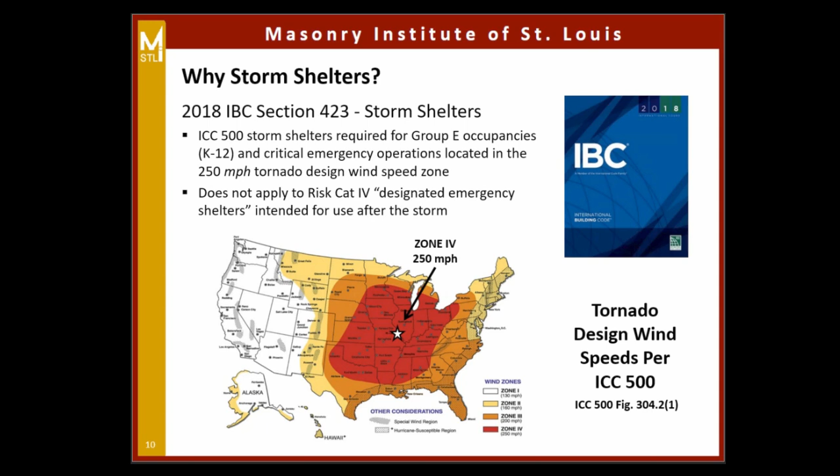So how many architects do we have with us today? Oh boy.

I'll apologize in the beginning that most of our discussion today is going to be structurally related, in particular with the ICC 500, which gives us everything we need to know about designing and constructing storm shelters, focusing primarily on the things in Chapter 3, which are structural design. But there are a number of chapters where architectural aspects fall, and that's a very important part of the overall storm shelter design and construction. The Institute has had seminars related specifically to the architectural side, and I'm sure they'll have more in the future, but we're going to be focusing on the structural aspect.

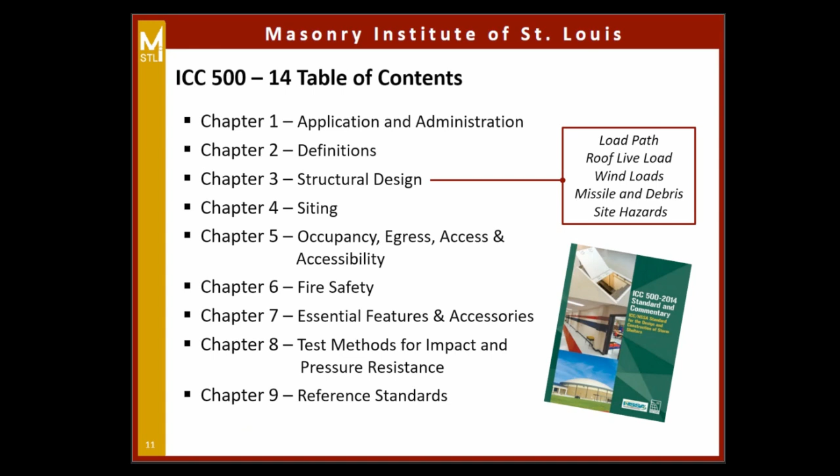How many have designed a tornado shelter? A few. Okay, very good.

So you're well aware of the increase in wind loads you encounter when you go from a normal building to a storm shelter level. Just to give you, for those who haven't done those calculations yet, here's a quick example of a little building I made up. I calculated both the non-shelter wind loads and the shelter wind loads, and you can see the line across the bottom: the increase in wind loads ranges from a factor of 2.3 up to 7.7. That's understandable because these tornadoes are very powerful and put a lot of pressure on these buildings.

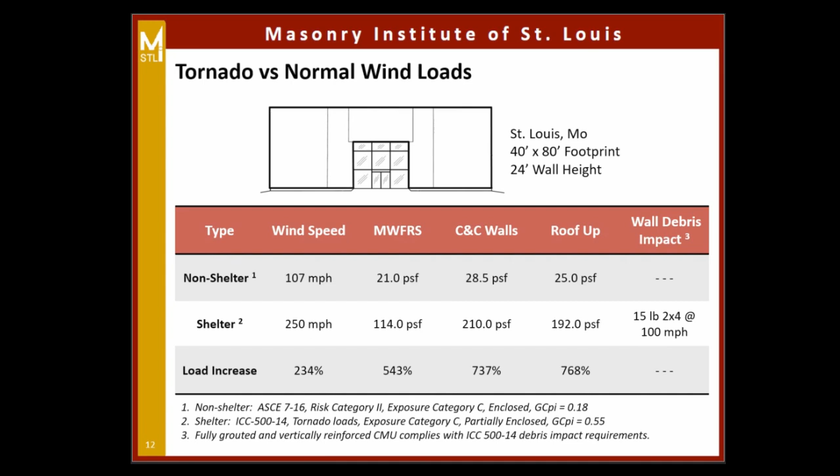The other thing you'll notice in the right-hand column for the shelters is the wall debris impact requirement. The code is trying to account for things the tornado may have in the air, throwing them around and maybe hitting our structure. The best gauge we have for that is shooting a 15-pound 2x4 at 100 miles an hour at your wall system. If it doesn't penetrate, you're deemed to comply with providing the minimum amount of debris impact resistance. The good news is fully grouted CMU with a minimal amount of vertical reinforcement satisfies this test, so it works very well for that.

Second bullet point: what about concrete masonry shelters? Well, the obvious one is I'm a masonry guy, and you're sitting at the Masonry Institute listening to a masonry seminar, so we are going to talk about concrete masonry storm shelters. When we first started seeing this mandate coming into the IBC, which I think was first in the 2015 version, we said there's going to be more projects requiring storm shelters in the future, especially schools. If you think about the type of material you'd want to resist high winds and impact, a mass capacity material like concrete masonry is a good choice. Also, masonry has a long history on educational projects, so we're sort of on the job already. We felt that taking a concrete masonry building on a school campus to the storm shelter level should be pretty manageable.

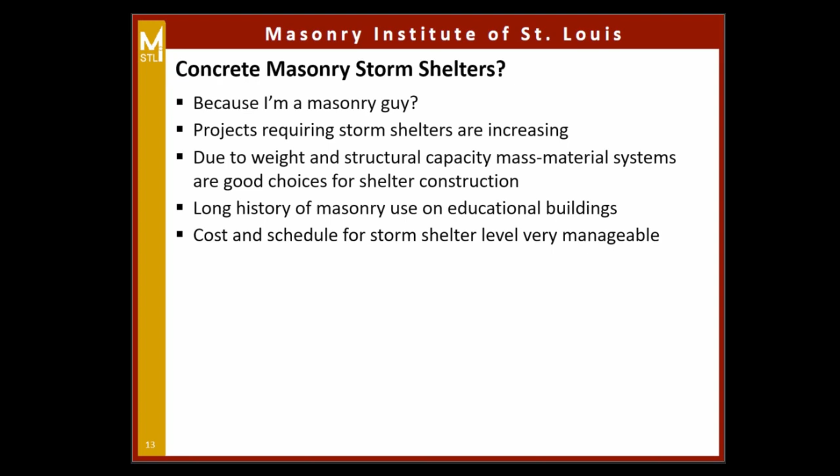These were the thoughts we had internally, and we wondered how we could go about verifying some of those. So to quote a famous TV commercial, we started saying 'Where's the beef?' To that end, in the summer of 2021, right after COVID was letting go of everybody, we brought some masonry designers into town and spent two days talking about what it would take to have concrete masonry serve for the wall systems of some storm shelters. We had a lot of discussion about requirements and detailing. We also brought in, on the second half of the second day, some of our local mason contractors and their foremen and superintendents, and talked to them about going from a regular building level to a storm shelter level, which was very helpful. And of course, no good meeting in St. Louis would be complete without going down to the Hill and having some Italian, so we did that as well. But the primary goal of the summit was to show that structural CMU can be used for tornado shelters for common educational uses, and when used, what the related detailing might look like.

Sorry for the busy slide, but I wanted to give you an idea of what the summit was like and what was determined during the summit and post-summit.

There are black bulleted points, and each one has its own backstory, but unfortunately I'm not going to have time to drill down into that today. I'll just let those speak for themselves right now. If you have questions, see me later or email me.

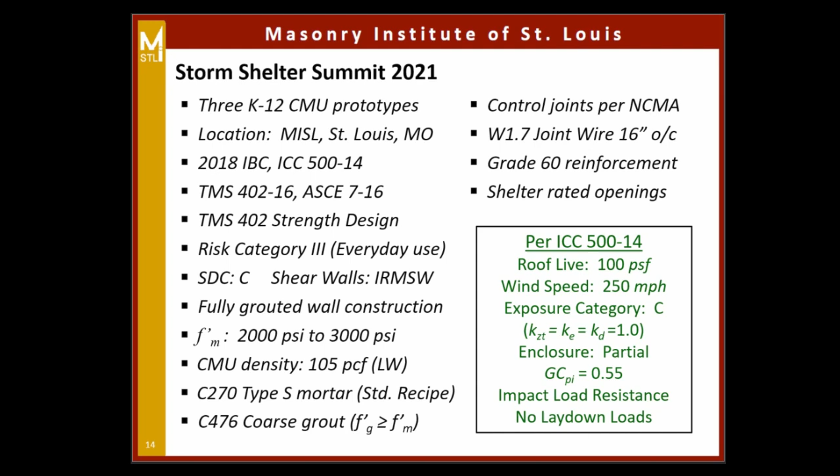So we came up with 3 prototypes, and what I'd like to do today, as much as 60 minutes or an hour will let us, is give you the current status of each one of the 3 prototypes we've been working on.

The first one you see here, we're calling it the elementary classroom. It's this shelter-in-place concept. You already have the students there, so if you increase the capacity of that structure so they can also shelter from the storm there, that might be a good approach. We're showing it as a standalone building for convenience and clarity, but this could be part of a longer wing, or it could connect to a bigger building as well.

Based on the footprint and height shown, and based on the literature review we did, we decided to go with hollow core planks, a precast concrete plank that would make the roof system. By the time we put a concrete topping on that, we estimated our roof dead load could be as high as 100 PSF. This is important when designing a tornado shelter because of the high uplifts you encounter on the roof system.

The more dead load you can have up top and still hold it up with your wall system, the more it helps offset the uplift from these wind events. You can see the list of wind pressures we calculated for the building, including the components and cladding, which we use for out-of-plane loading, and it's very high, 209 PSF.

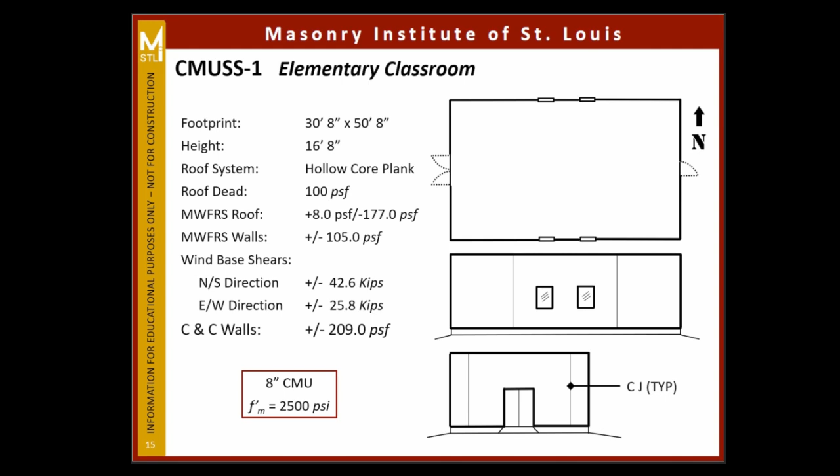Now, we're not designing the roof per se, but we did give it some thought in terms of size and layout. Of course, the final design would have to be by the engineer of record and also the manufacturer of the roof system. But we did anticipate having 4-foot wide panels, and that we would span from the top of the slide down to the bottom.

So those walls, top and bottom, would be what we're calling load-bearing walls, because the spans land on those walls, and then the other walls, where the walls are parallel, we're calling those non-load-bearing. Now, all walls do have some vertical load on them, so that's a little bit of a misnomer, but just to keep us straight on which walls we're talking about, that's what we decided to do.

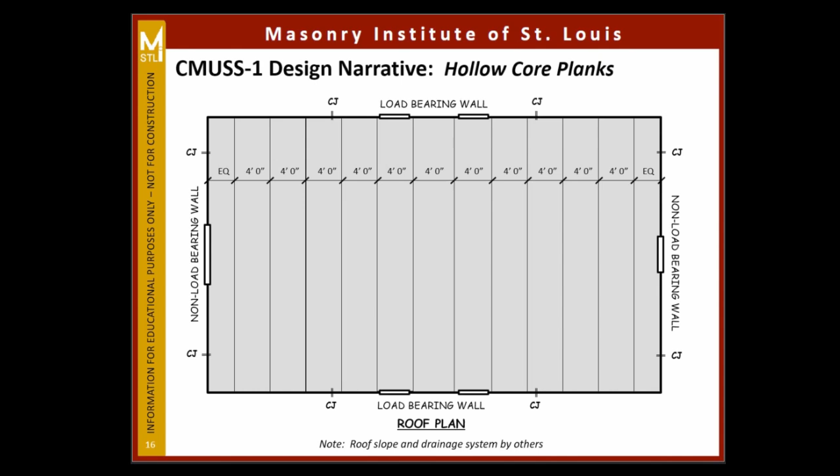And by the time you offset that with the weight of the wall, you still wind up with a little bit at the bottom of the wall. For the jamb, it goes up a little bit, of course, again because of the extra load that's coming from the missing masonry, so to speak.

The approach that we decided to take on this one is to develop that uplift into the wall. So we're using those 2-foot by 2-foot number 5 reinforcing bars that are bent in an L shape to connect the hollow core down to the wall. And by the time you have the correct development length, we can dump that uplift into the wall.

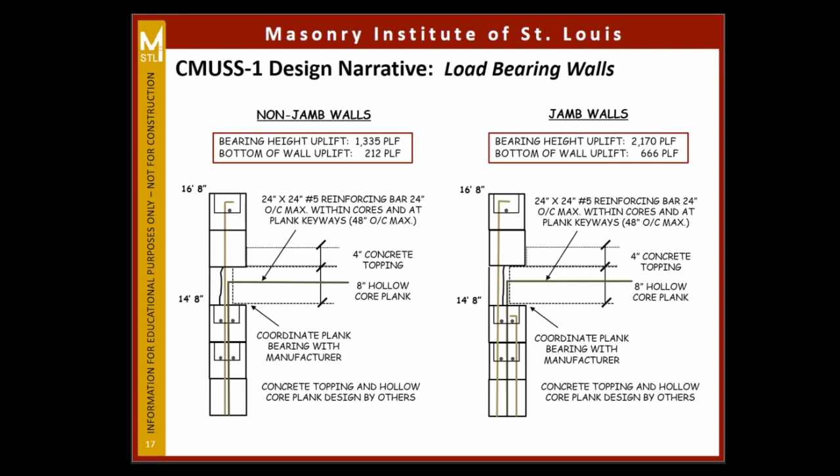For the non-load bearing, you can see now that we're looking at the cores of the hollow core. We're again going to let those come over onto the wall. There's a lot less load coming from the roof on these walls, so you can see the uplift is a lot less. As a matter of fact, we wind up having none at the bottom of the wall. So we're using the same approach. We're going to develop that uplift into the wall and then let the vertical bars deliver it to the foundation, or to the dowel to the foundation.

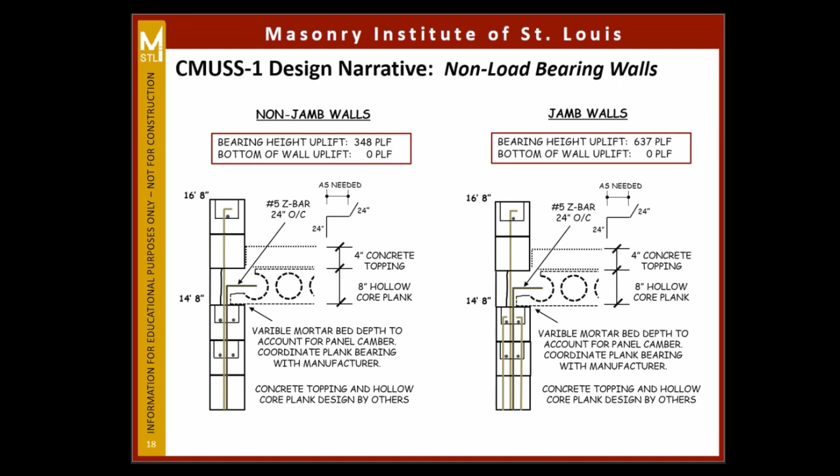But in this case, because of the change in the format of the hollow core, we're counting on what I call a Z bar, which is a number 5 that goes down into the wall, up and over, and then into the page, or to the slide, if you will. And that'll all get grouted in together and connect the hollow core to the wall in that fashion.

So I wanted to show you a little bit what we're finding out on the vertical and horizontal reinforcement. This is kind of a schematic. I hope you find it helpful. This is for the load-bearing walls. So the panels are landing on these walls. This would be for the north-south elevation if you're tracking that. The green bands represent the horizontal reinforcement in either a bond beam or bond beams or a beam over or under an opening.

At the top we have that one course bond beam with a number 4 bar. Coming down to the bearing bond beams, there's a 2 course. We're going to have 2 number 4s in each one of those courses.

We decided to put a bar at the first course at the bottom of the wall. Some masonry designers feel this is kind of optional. The general feeling I've seen is that it's good to have a horizontal bar in the vicinity of the dowels coming out of the foundation, either within the wall or at the top of the foundation itself. Since this wall is already fully grouted, it's not a big deal to lay another bar in there and take care of that. If I was doing a partially grouted building, I may or may not put that bar in there, but then you'd have to coordinate that with the foundation designer.

Then the beam, we have beams over and under the 2 window openings there. Above, we have a 2-course beam with a number 4 bar in each course. That beam delivers the vertical load to the sides and also the out of plane loads from the masonry above and the window below to the jambs on each side. We put a 1-course beam underneath the opening for good measure with 1 number 4 bar there. You'll notice we've decided to extend that detailing to cap the total jambs on each side of the openings. For the jamb width, we took advantage of what masonry was available and used that as our total jamb.

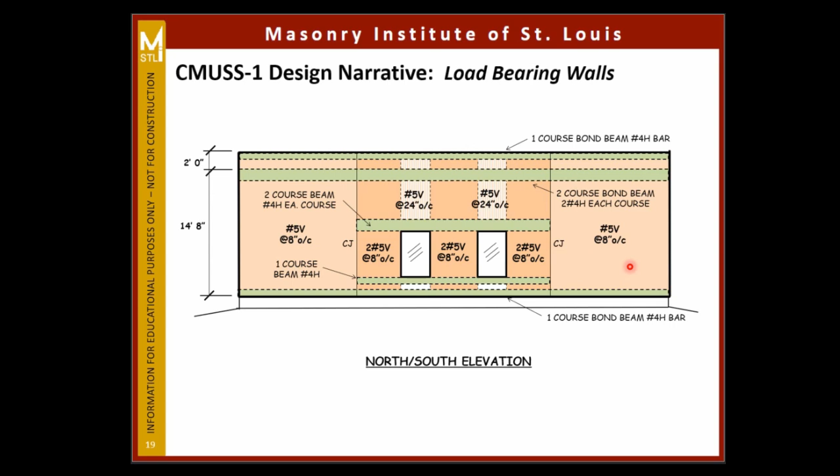Looking at the non-load bearing, here the panels, the hollow core panels, are parallel to these walls. Most of this is the same, I believe. The beam over the double door went to a 4-course with 2 number 4s in each course because that's a little wider opening, more load coming to the jambs to get the vertical load and the out of plane load to those jambs. The jamb width, we decided to go with a 6T assumption on the jambs.

The reason for that is it was kind of done historically, but also because there are no control joints at these openings, so we felt like we could have this all work together as one item around the opening. A 6T for an 8-inch unit would be 48 inches, or a 4-foot effective jamb is what we're counting on there. In this case, because there is more load, the jamb reinforcement went up to 2 number 6s, 8 inches on center, rather than 2 number 5s. But on the lower elevation there, where we're back to a smaller opening, it did go back to 2 number 5s.

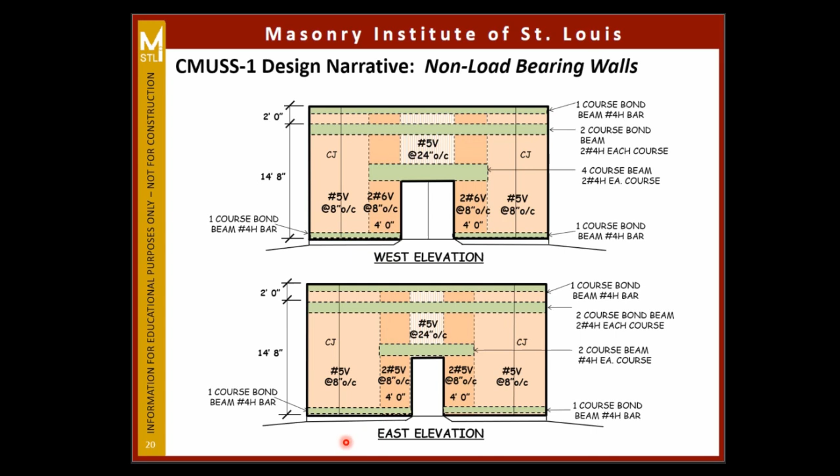So the second prototype is what we're calling a middle school gym. We wanted it to be big enough to have a basketball court, so it could be used to play basketball, or it could be used just as a general activities room. You can see the footprint there. The overall height of the building is now 30 feet. We're starting to track the ceiling height because if you play volleyball or something in there, you need that extra height to do that.

For this building, we had seen in the literature where precast double T concrete roof system was used a lot. So we decided to go with that, and we felt like with a concrete topping on there, we could be at 100 pounds per square foot dead load again. Again, you can see the wind loads that we came up with for the building based on its size and shape. And we decided to go with a 12-inch unit, but holding the F'm at 2,500.

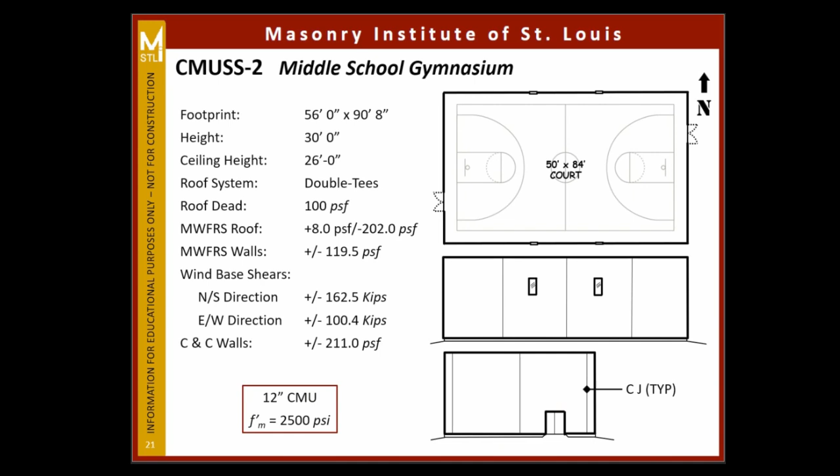Moving on to the roof, again, we're not doing the final design here, but this is what we're envisioning: 8-foot wide double T panels, shown by the solid lines. The dotted lines represent the T stems that come down 4 foot on center. We were expecting these to span from the top to the bottom, so we have load bearing walls up top and non-load bearing on the sides.

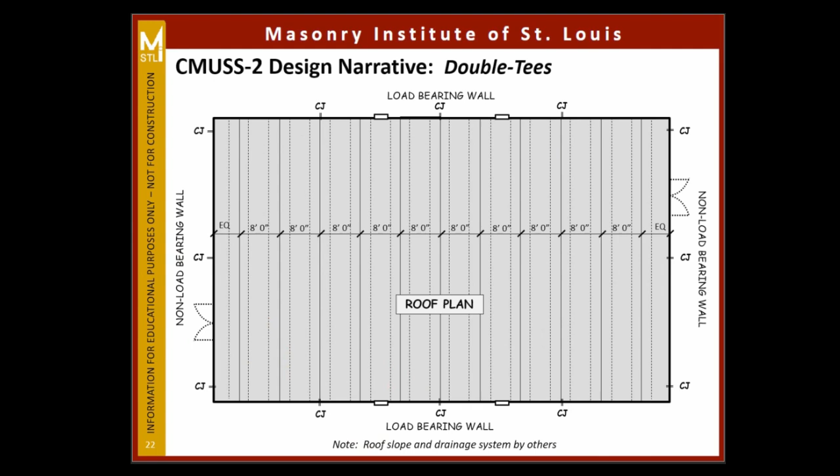So the top of wall detailing for this system works for both jambs and non-jambs, for load bearing jambs and non-jambs. The reason the same detail works is whether it's a jamb or not, it needed 2 bars per cell, so really the same detail works. The only thing that changes is the vertical bar size.

You'll note the uplift box there. We're estimating that each double T stem, when it lands on our wall, will be bringing approximately 15,500 pounds of uplift. That became more than what we could handle by dumping it into the wall and expecting the vertical bars already there, doing something else, to get that uplift down to the bottom. So we had to go with a dedicated tension tie.

You can see that called out down here at the bottom. So at every double T bearing location, there's a bar that's going to be welded to the bearing plate in the masonry, continuous all the way down to the foundation. It's not counted on for out of plane or in plane design. It's only there to be engaged if you get net uplift coming from the roof system, which you definitely do in this case.

So you can see we're letting the double T come over and share the 12-inch wall below. We decided how we're going to enclose the ends of the double T's, since they're generally not solid, by going with a 6-inch closure wall. That goes from the top of the bearing all the way up to the top of the wall. The purpose of the closure wall is to give us that impact resistance, and it closes off the ends of the double T's.

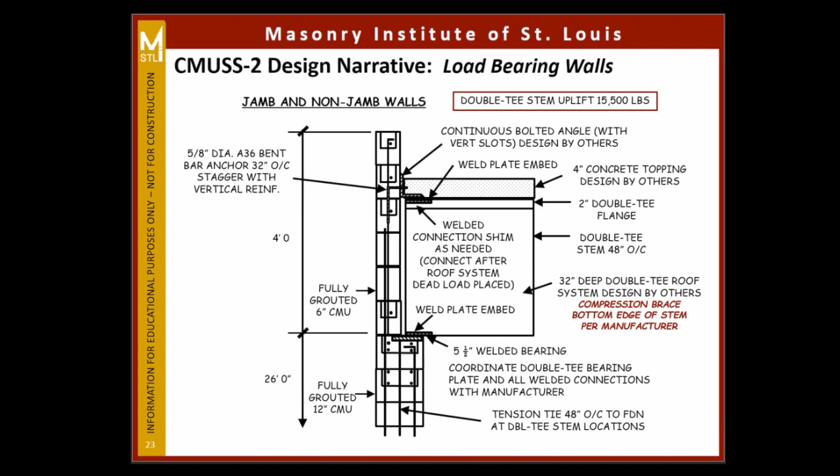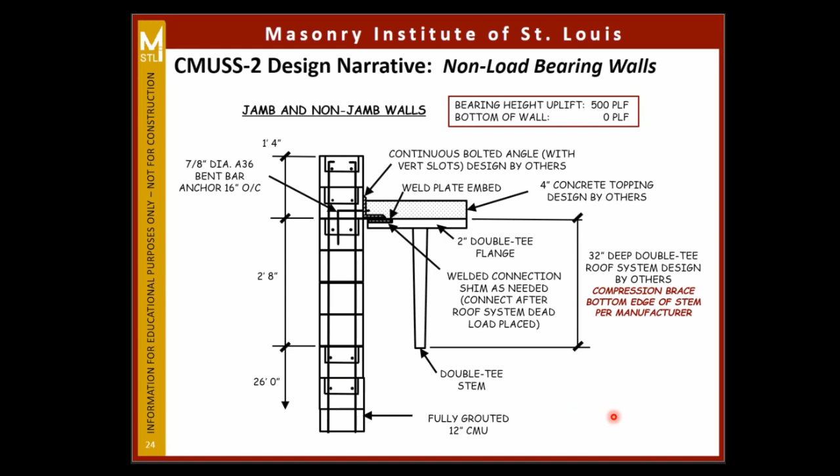So looking at the horizontal and vertical reinforcement, the same kind of pattern we saw before. The green is for your bond beams or your beams over and below windows. You can see the jambs there. We're using a 6-foot again for the jamb width, so that would be a 12-inch unit. Would be 6 feet for that, and that's what we're counting on for the jamb width.

The non-jamb vertical reinforcement you can see is 2 number 5s, 8 inches on center. When you get into the jamb, that would go to 2 number 6s. This masonry below the window needs a little bit of help, so we're putting a number 6 bar, 8 inches on center there. Then we go back to the 2 number 5s, and again 2 number 5s on this panel over on the far right. This white panel, just the panel to the left, would be the same as the panel to the left - I just didn't bother to color code it.

Notice the tension tie there all across this elevation. That would be at each double T stem bearing location, and that would be a number 6 vertical bar going all the way down to the foundation. The rest of the horizontal reinforcement is pretty standard, what we've already seen on the top of wall detailing.

I did want to talk about the closure wall. You can see that's up here, the 6-inch closure wall. We're counting on a number 5 vertical, 32 inches on center there, and the bond beams called out here agree with that top of wall detailing that we saw. But we had a decision to make where the 6-inch wants to become a 12-inch, and what we decided to do is let that 6-inch unit just die into the 12-inch unit. So what you're seeing in white here is a 12-inch unit from the side walls coming through.

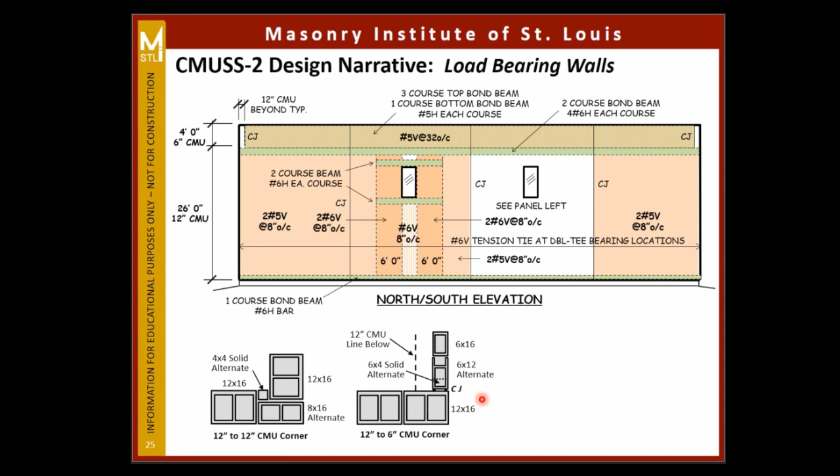But when we had that 6-inch at the top, we decided to let that 12-inch unit come through and die the 6-inch unit into it. We'll probably put some control joints there to give a little movement if we need to, so we don't get a lot of cracking there. You can see the 12-inch bearing line below where the double T's will be coming in to this system. And then, to stay on bonding again, the mason will have to do a little piece of solid and then take a unit, cut it down to 12 inches.

So if you look at that in elevation, you have that 12-inch to 12-inch corner down here. Above the 26-foot bearing line, you have the 12-inch units showing with the control joint, and then whatever the mason needs to do there to get back on coursing. May not be the best detail architecturally, but we thought for now structurally that's what we would go with to do that transition.

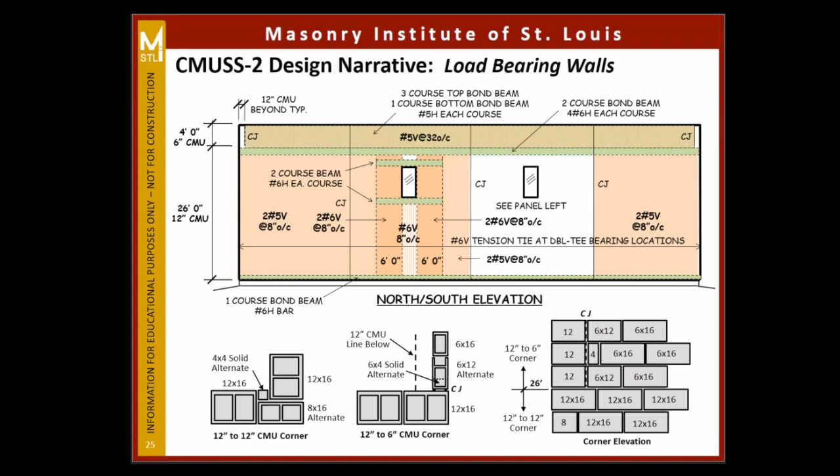The non-load bearing wall reinforcement schematic there, very much what we just saw. Still 2 number 6s, 8 inches on center.

When we get to the jambs, because of the bigger door, the size of the opening, and because this wall spans taller than the other walls, we had to go to two number 8s, 8 inches on center for the jamb reinforcement. And that beam over the opening is a 3-course beam with a number 6 horizontal bar, top and bottom, to make that system work out. We're doing a number 6 vertical bar, 8 inches on center over the opening.

And again, no tension ties needed on these elevations for the east or the west. So also no closure wall needed.

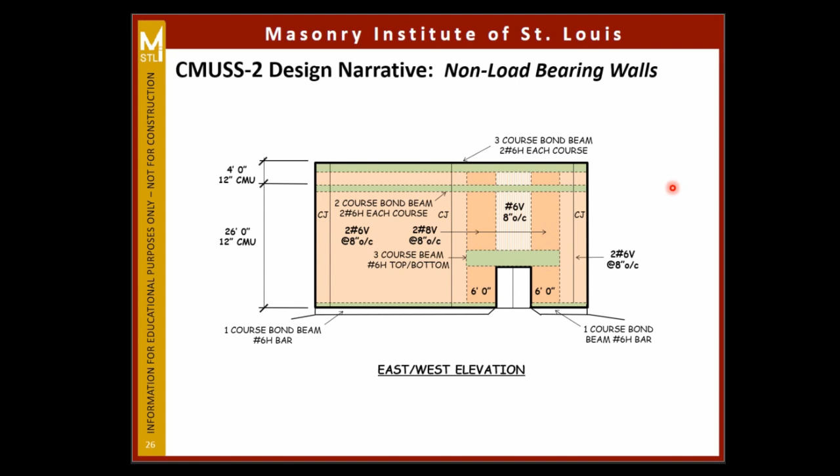All right, so here's the third one. It's the largest one. Look, what we're calling perhaps a high school gymnasium, where you enclose the basketball court, but you also have some space for some bleachers on one side. And so this 104 foot by 104 foot is the size of this building, 38 foot tall.

With a ceiling height of 30 feet. We had seen in the literature where some double T's are used for this size span for storm shelters, but to be different, we wanted to see what it would be like if you tried a structural steel roof system, just to see how that detailing would come out.

Now, the first thing you're faced with if you do that is that it's going to be a lighter system overall. Even if you put a concrete topping on it, we thought we could only count on 60 pounds per square foot of dead load. So not only is the building going to have more uplift due to its size and shape, but also the fact that it's going to have a little less dead load on the top.

And you can see those wind loads there that we calculated. We wanted to stay at a 12-inch unit, but we thought we might go up to an F'(M) of 3,000. This is still within range of most areas in the country. Certainly here in the St. Louis area, you can do an F'(M) 3,000 quite easily.

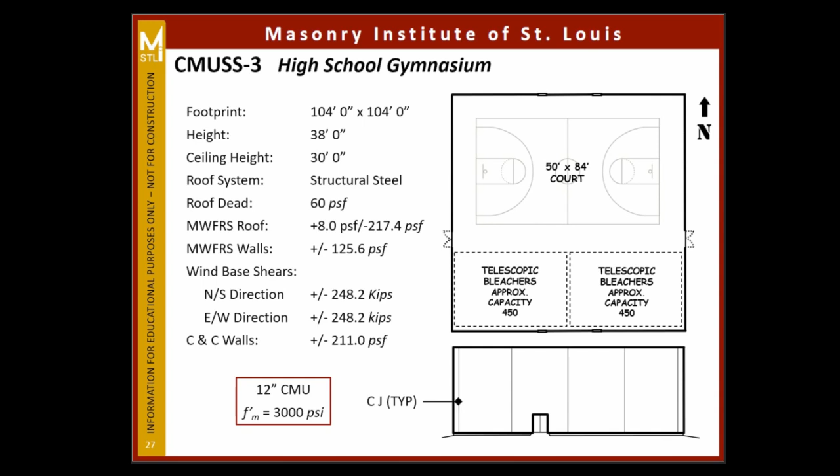So a little bit of a busy slide because of the size of the building, but basically, first of all, I wanted to thank Dr. Mark McGinley from the University of Louisville. He did the preliminary schematic design on the structural steel roof that you see here.

Basically what it is, an 80-inch deep joist, main joist, that's spaced 56 inches on center. You can see that we're anticipating having some double joists to straddle the door opening, because each one of these joists will need a tension tie at the bearing, and we didn't want that to happen over a door opening.

So we're going to put doubles on each side, or anticipate putting doubles on each side. We may put another joist in between the two doubles just to pick up the roof load, but we're not counting on it that much for uplift.

You'll also notice that we have turned the joist at the ends of the building with what we're calling sub-joists that are 80 inches deep and 56 inches on center. One of the reasons we did that is that it allows us to keep the bearing height for the system the same all the way around the building, as you'll see in the top of wall detailing.

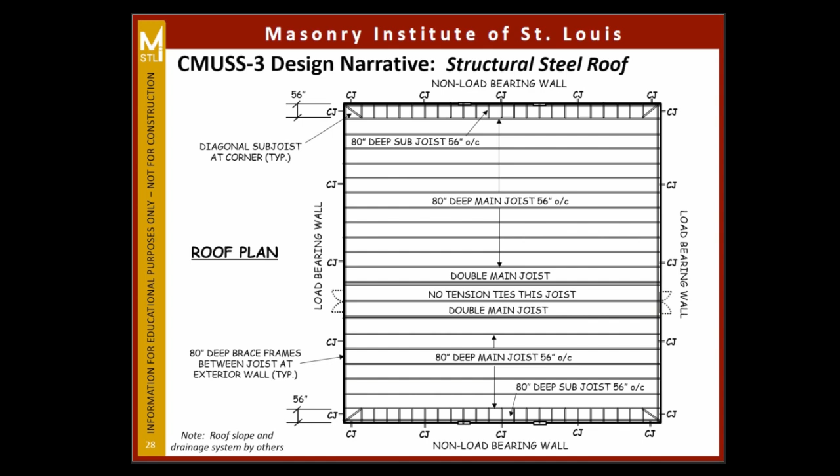We're also anticipating that you could put 80-inch deep brace frames between the ends, in between the main joists at the ends, and also in between the sub-joists to provide more lateral stability for the system overall.

Top of wall detailing, this will be for both the load bearing and the non-load bearing, because the top of the wall bearing height remains the same. It also works for jamb and non-jamb, because we again need 2 bars per cell either way. It's just the size of the bar will change. And we're letting the main joist or the sub-joist come onto the wall.

And again, we're using that 6-inch closure wall as we did with the second prototype. A little bit taller, but we were able to still get it to work, serving those same purposes. In other words, providing the closure to the system for impact, but also helping dump the shear from the diaphragm down to the wall below.

Now, we also anticipate that this brace frame in between could also help do that, but that would depend on the final design and the engineer of record, how they wanted to approach that.

The 2 bond beams underneath the bearing, again, serve as diaphragm chords, but also they've been checked to support the top of the wall in between the bearing location, which is 56 inches on center.

And the uplift here, as you can see, for each main joist, we're anticipating 40,000 pounds of uplift coming from each one of these main joists. Now, the sub-joists that are turned the other way would be much less. So the key is for those main joists, and again, we're going to do a tension tie, as you can see right here, that would go from the bearing point all the way down to the foundation.

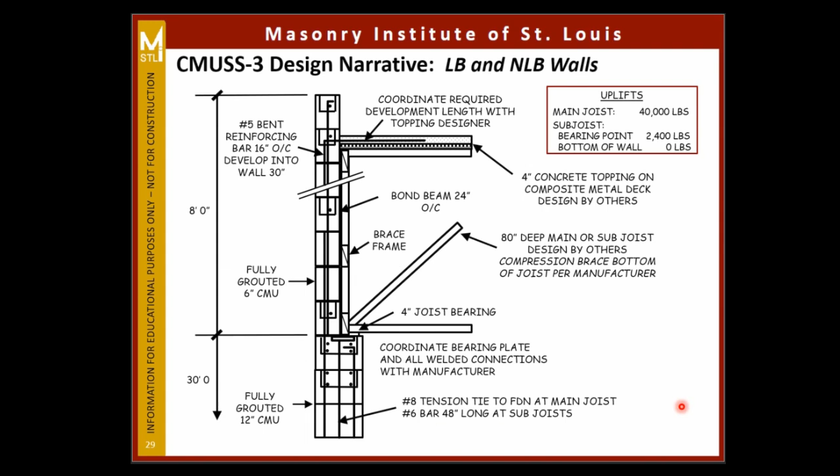Horizontal and vertical reinforcement, color coding is the same. The non-jamb is 2 number 6s at 8 inches on center, going to 2 number 8s in the jamb location, which is 6 feet wide.

Looking at this, you could extend this detailing over to the control joint if you wanted to. We decided not to show it that way for now. Then back to the 2 number 6 vertical bars.

We have a 6-course beam over this opening due to the size of the opening, the span, and the out-of-plane load coming on the building. 6 courses of masonry with 2 number 7s at the top course and the bottom course, so that's about a 4-foot deep beam there.

The closure wall works pretty much the same as before, except we're not having to make that transition. We're turning a 6-inch unit around the top of the building, which we felt was a lot easier that way.

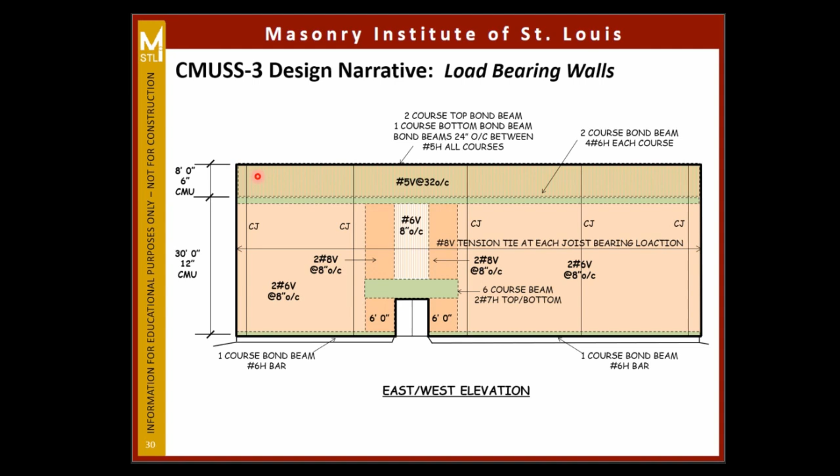Okay, that was load bearing. This is non-load bearing, where we have the little window opening, 2 number 6s again, and the non-jamb.

Now we're only at 2 number 7s for the jambs, and the top of the wall still works the same. Tension tie not needed here because we're able to distribute that uplift from those smaller subjoists down into the wall.

I know that was really quick, but that's what we have so far on these 3 prototypes. The good news is so far it's showing us that we can use reinforced concrete masonry for storm shelters on some of these common educational uses on projects, and we think it should actually be a system worth considering on those types of projects.

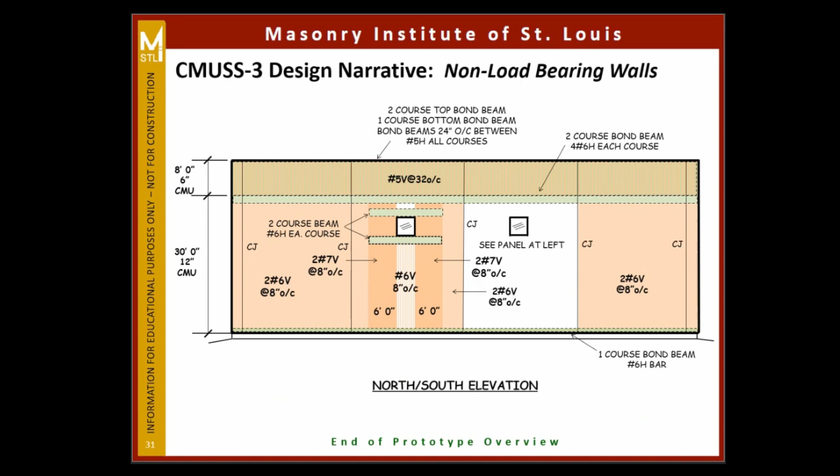What I'd like to do for the time we have left is share with you some of the other things related to the storm shelters. First of all, some comparisons we've been making, shelter versus non-shelter. At the top here, we're looking primarily at structural, where we have the 3 prototypes listed.

You can see the change in the CMU—actually, there's not much of a change really, except on the second one. The big change is that the non-shelter can be done with partial grouting. The storm shelter, even if you could get it to work with partial grouting, you would still need to fully grout for the impact resistance. So that's just a given on storm shelters.

Looking at what I call the base reinforcement, in other words the non-jamb reinforcement, you can see for the shelter on the smallest one it was 1 number 5 at 8 inches on center. We could go to a number 4 at 32 inches on center if it was a non-shelter.

For the second one, 2 number 5s, every cell, could be a number 5 every 2 feet. And then on the larger one, 2 number 6s at 8 inches on center could be a number 6 at 16 inches on center.

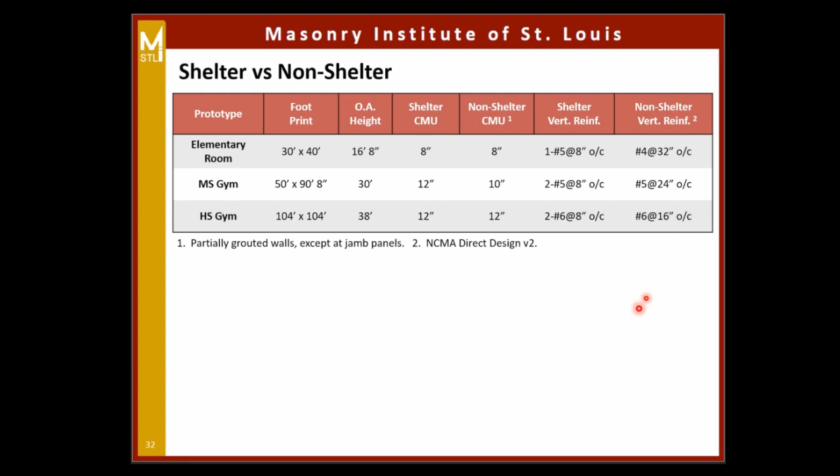Then once we took a look at that, we also wanted to get a feeling for what is the cost change and schedule change going from a non-shelter to a shelter.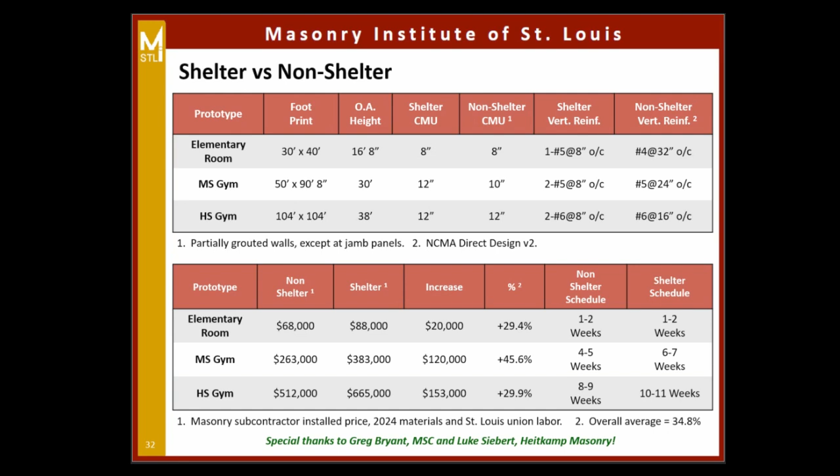Big thanks to Greg with the Masonry Structural Coalition for running those numbers in conjunction with Luke Siebert, one of the owners over there at Heitkamp Masonry. We appreciate them working through that.

The last bulletin point was what about seismic? And what I decided to do here is, seismic is still important. You have to design these storm shelters for seismic even if you're in a low seismic area. But what I decided to do for the 3 prototypes is show you the base shear coming from the seismic compared to the wind, also the out-of-plane wind load compared to the seismic.

What you'll notice for our 3 prototypes, since we're pretending these buildings sit right here where you're sitting, based on the seismicity, you can see that the wind base shear always controls. So your in-plane design is going to be controlled by wind, and your out-of-plane is very much controlled. It really drives the bus on these out-of-plane designs.

But you might say, well, what if you're somewhere where the seismicity is higher? So I did the same thing for Cape Girardeau, where I assumed they would be seismic design category D, which drives up the seismic forces. You can see for these fully reinforced larger walls that the seismic base shear starts to compete and take over the wind, but not by much, okay?

And then if you look at the out-of-plane, you're still 3 times more on the wind load. So typically what happens is you size everything for the out-of-plane wind. What we're finding is by the time you do that, you have more than you need for the in-plane shear walls, especially these prototypes that have longer concrete masonry shear walls. So it's really still the wind that's going to govern your design there.

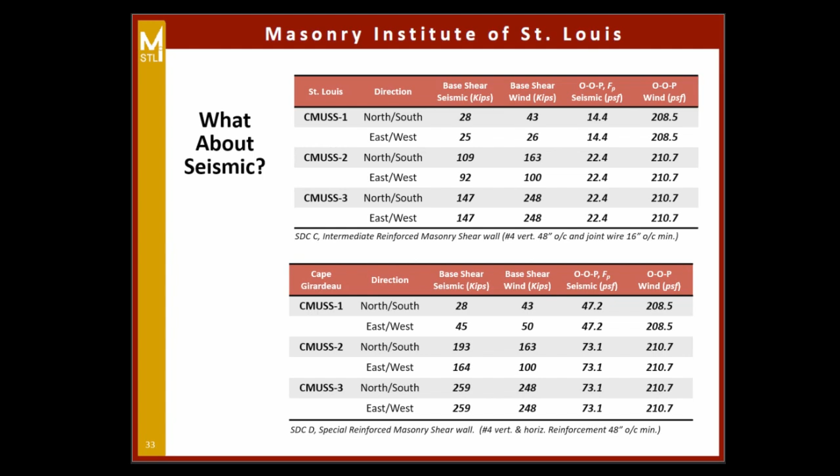Just a few other things. Lap splices. We do intend to have a full table of lap splicing for these prototypes. We are using the lap splice equation from TMS 402, Chapter 6. We are not counting on the IBC 72 bar diameter cap that it places on this equation. We just thought that wasn't prudent to do for these storm shelters. Also, if the calculated lap splice was less than 48 bar diameters, we're thinking about increasing the lap splice to 48, because most of our masons are still very familiar with that old 48 bar diameter rule for lap splices.

Now, using this equation, if you have a big bar that's offset toward the outside face of the wall, you're going to get some long lap lengths. As a matter of fact, for the number 8 bar that we saw in some of the buildings, the lap length is 117 inches, which just doesn't make sense anymore. So what we're probably going to do is recommend that for number 7 and number 8 bars, you go to a mechanical coupler instead of trying to lap those bars to do your splicing.

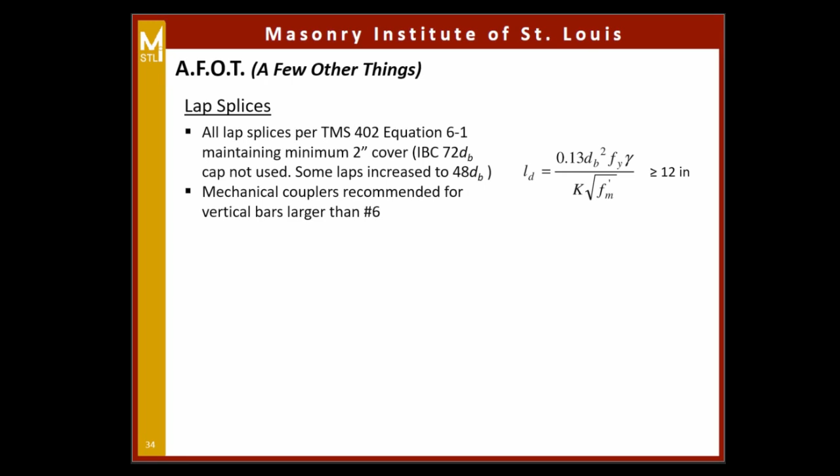They're becoming more popular, more projects are using them, and we think it's probably the way to go for this. And then the foundation and foundation doweling, we're not doing any of that design, but we'll probably give some guidance for what the wall needs from the doweling.

So the first prototype, the smaller one, we're anticipating a dowel 24 inches on center coming out of the foundation, and we'll probably want the size and number of that to equal what the wall is doing above. And then we'd want that dowel extended into the wall based on the lap splice table we come up with. Now the other two, the larger ones, let's take a look at the middle one first.

We're anticipating a number 6 dowel needed for the wall, 24 inches on center, between and at tension tie locations. And we expect that dowel to extend up into the wall 4 foot. That way we can give the wall what it needs in terms of doweling, but also give that tension tie what it needs to deliver that uplift load to the foundation.

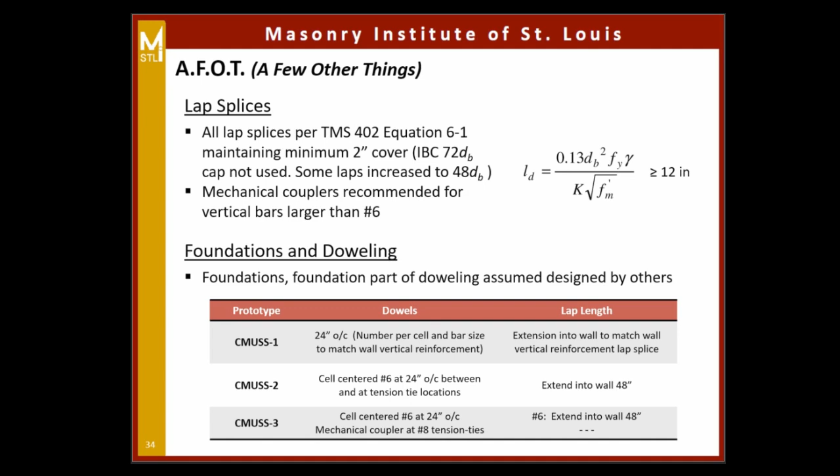For the larger one with the larger uplifts, away from the tension tie, we're still going with the number 6 at 2 foot on center. We extend that up into the wall 48 inches, but when you have a number 8 tension tie, we're probably going to recommend that's done with a coupler. So there's going to be a receiving coupler in the top of the foundation, and either a threaded bar or some other kind of coupler where you can connect that tension tie into the foundation and get that load down into the ground, hopefully eventually.

Masonry veneer. We do expect many of these storm shelters, if they're concrete masonry, to have masonry veneer on them, anchored veneer with an insulated cavity. That's a great way to address the overall thermal performance and moisture protection of the walls, in between tornadoes, if you will. But our assumption was to assume there's no veneer there, or it's been lost to the tornado.

And the reason for that is if you design your anchored veneer per chapter 13 of TMS 402, that prescriptive detailing is only good for up to 55 pounds per square foot at the most. And we're well exceeding that with these out of plane wind loads.

So the moral of the story is if you want to have a veneer on your storm shelter and you want it to stay in place during the storm, then you're going to have to engineer that whole veneer system as well, so it has enough anchorage to stay on the wall. Otherwise, it's going to become potential missiles for the tornado, which is maybe something we can't avoid too much at the end of the day anyway.

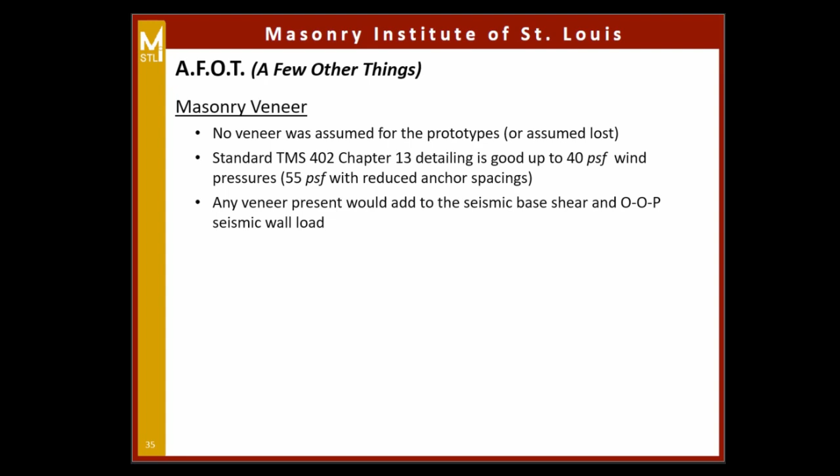The other thing to keep in mind, if you do add veneer to the exterior of the walls, it will add to the seismic base shear and to the seismic out of plane load because of that extra weight you have to take into account.

The last one here is quality assurance, quality control. I just wanted to point out that the same care and effort we take on all of our structural projects apply, of course, to these storm shelters.

You have to have a quality assurance plan. You have to have special inspections. In this case, for the high winds, you're going to have structural observations. You need the statement of special inspections, pinpointing the possible list of inspections that are going to be applied to that given storm shelter.

And then in addition, the ICC 500 requires in almost all cases an independent peer review on your design for the storm shelter. So once you're done with your design, you have to send it to somebody independent, let them go through everything, make comments, write a report, and then that gets submitted along when you do your final approval with the building authority.

We had heard from some of our precast competitors saying you don't want to use concrete masonry for storm shelters because you have way too many special inspections. And we take exception with that. Every structural system used on a building has to have special inspections. And if part of it is fabricated off-site, it still has to be specially inspected. And then when it is installed, when it's craned in place and welded, the connections, if it's a precast wall, those become very, very important special inspections.

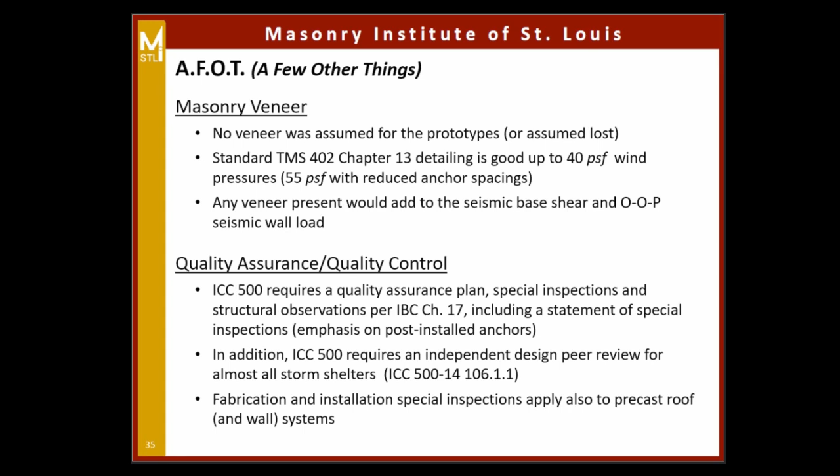So I'm sorry if that sounds a little crusty, but I'm retired now, so that's okay. I always say special inspections are our friends all the way around.

Well, that brings us to the end of what I have for you today. So much more could be said.

Looking at what's next, we hope to keep finalizing our prototypes and getting them vetted and reviewed. We're also working on some Revit files for the floor plans, wall elevations, and details, if people may find that helpful. We also intend to finish with a white paper or final report on the whole process, which would be available to everyone, and then more PowerPoints like we've been doing today.

I just quickly wanted to thank the designers who came for the storm shelter. You'll recognize these names; they've been presenters here multiple times: David Biggs out of New York, who'll be here next week; Mark McGinley, University of Louisville; Jason Thompson, who at the time was with National Concrete Masonry Association; and Scott Walkowicz out of Michigan, who is the current TMS 402-602 chair. So we had some pretty good heavy hitters from the masonry industry work through this.

Also some great industry and staff support: David Gillick of the Mason Contractors, Greg Bryant of course with MCAA, and Margie Gagne, who did a lot of work—thank you, Margie. And then also Mark Wilhelms from the Midwest Block and Brick. He attended the summit and offered a lot of great input. Many of you work with Mark; he's a wealth of information, so we really appreciate what he was able to do.

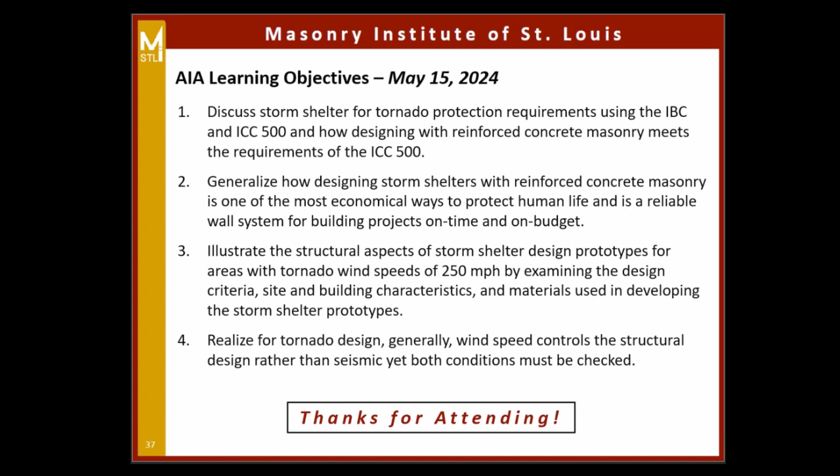Yes, Leonard. For IBC 514, you have an approved live load of 100 pounds per square foot? Yes, that's the requirement of ICC 500: 100 pounds per square foot live load. The reason is that it accounts for anything that might get thrown up on top of the roof during a tornado, like a school bus—we've seen pictures like that, and you probably have too. The other thing I didn't mention is that ICC 500 also requires you to look around your project. If you have radio towers or other things that might fall down on your building, you have to include that load in your design. Now, they don't tell you exactly how to do that, but they say you need to look around, and it makes sense—if that radio tower happens to fall on the building, we need to be able to withstand that too. Or tell them to move the tower.